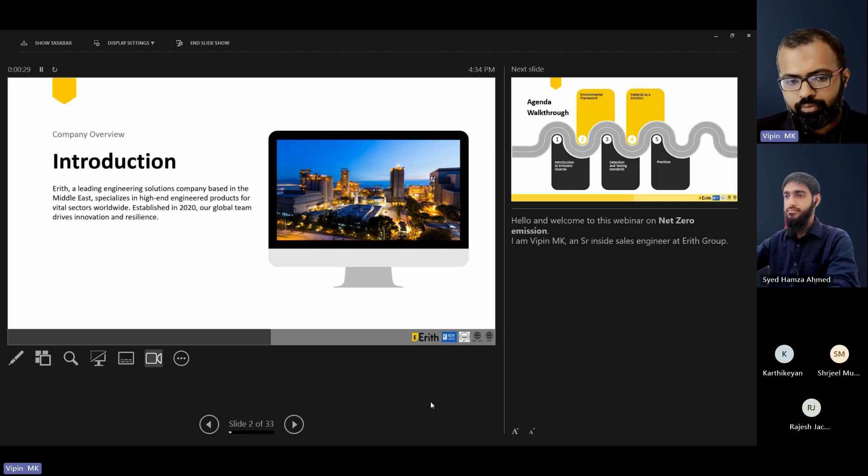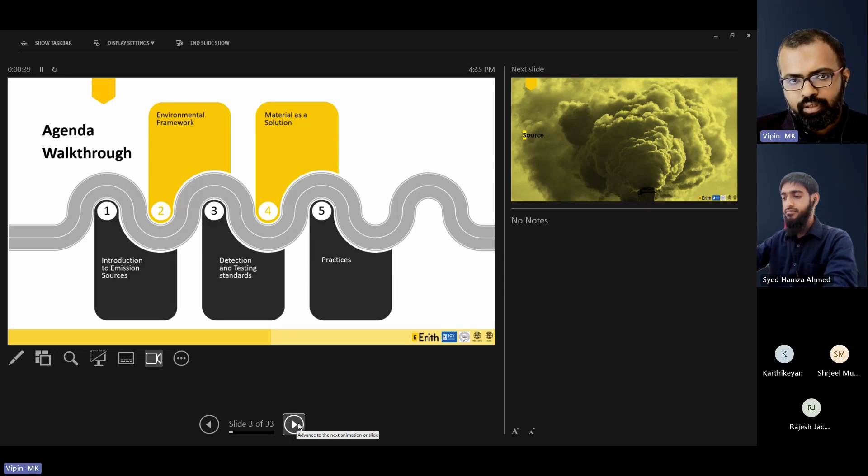So let's walk through the agenda. We'll start with introduction to the emission source, environmental frameworks, detection and testing standards, materials as a solution, and practices.

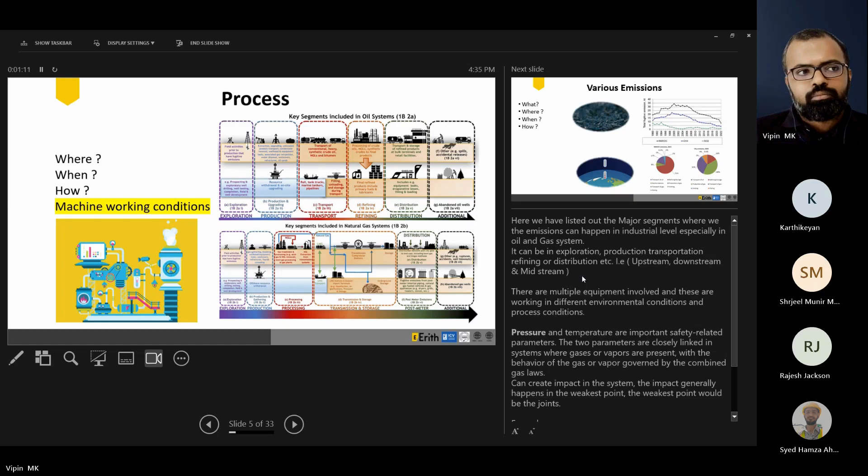So let's start with the source first. So here we have listed out the major segments where we can see the emission happening at industry level, especially in oil and gas systems. It can be in exploration, production, transportation, refining, or distribution, etc. That is upstream, downstream, and midstream. There are multiple equipments involved, and these are working in different environmental conditions and processes.

Pressure and temperature are the important safety related parameters. The two parameters are closely linked in the system where gases or vapors are present, with the behavior of the gas or vapor governed by the combined gas laws, and can create impact on the system. This impact generally happens in the weakest point, and the weakest point would be the joints.

Example, the blowout preventer, BOP, is a specialized valve or a similar mechanical device used to seal, control, and monitor oil and gas wells to prevent blowouts, the uncontrolled release of crude oil or natural gas from the well.

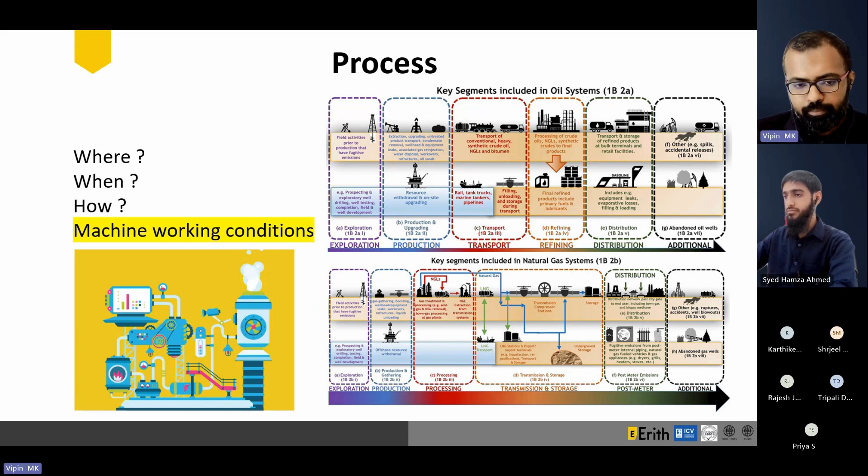Let's get into the next slide. Here we are explaining about the various emissions. You can see the graph which represents the emission level from 1990 to 2022. Below is a pie chart which represents the different segments and the ratio of methane gas and NMVOCs emission in 2022. NMVOCs are emitted to air as combustion products, as vapors arising from petrol and solvent use, and from numerous other sources. NMVOCs can have a negative impact on health and the environment.

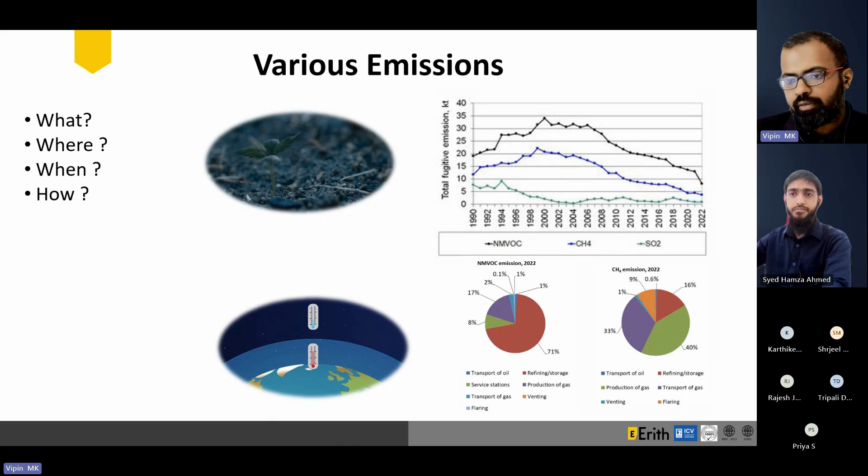Firstly, NMVOCs can react with other air pollutants outdoors in the presence of sunlight via UV, that is ultraviolet, to produce ground level ozone, which can affect the vegetation. Methane emissions are major contributors to the increase in greenhouse gases in the Earth's atmosphere and are responsible for up to one third of global heating. Methane is a potent greenhouse gas.

In this slide, we'll speak about the equipment which is emitting the uncontrolled fugitive emissions. As per the pie chart and as per the observation, it's around 60% of emissions which is from the valves, and other equipments like pumps, compressors, flanges, relief valves contribute the other 40% of emissions. As we have discussed in the first slide, the pressure and temperature are the important safety related parameters.

Here, we at Erith can solve 90% of emission from the equipment present. We will share the insights in the coming slides.

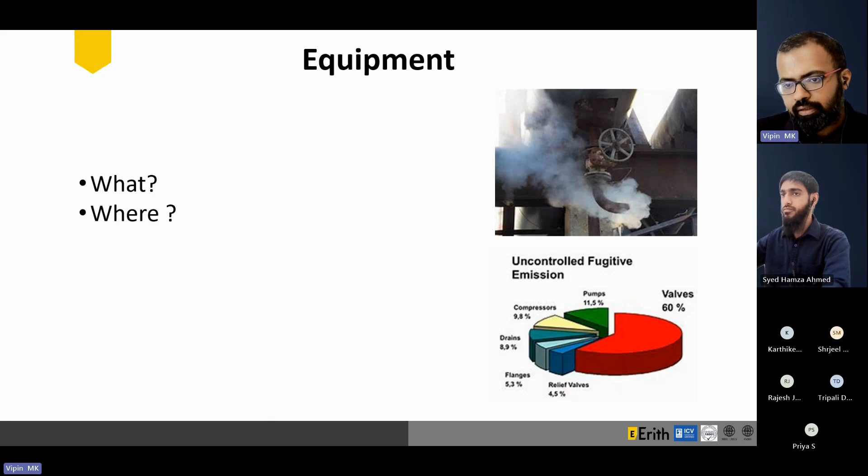Observation of leakage. Where to concentrate? Valve stem and other sealants like the flanges are the major part in a valve where the leakage can happen. Valve stem alone contributes around 80% of emission and the other 20% from the other joints like flanges.

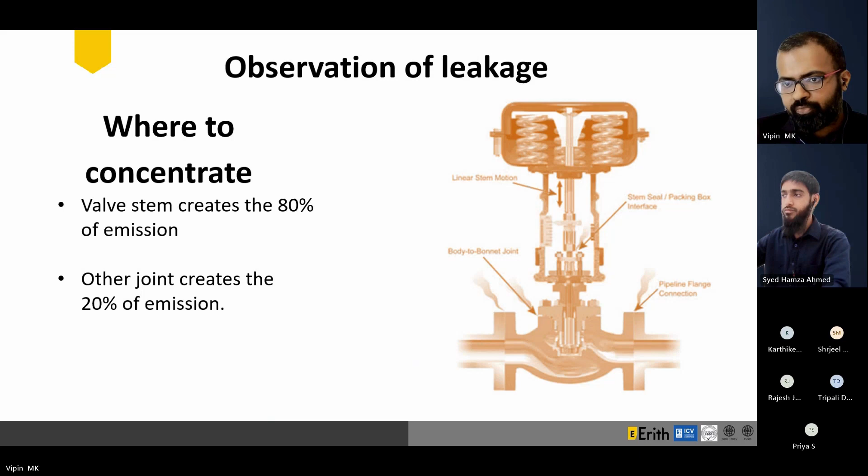Let's get into the environmental framework. So here we'll be discussing about the governance and other related parameters. So again we have to discuss about where the emissions are happening. It is happening due to human activity, because of different processes which are not monitored, or we can say ignorance, and because of that this is happening.

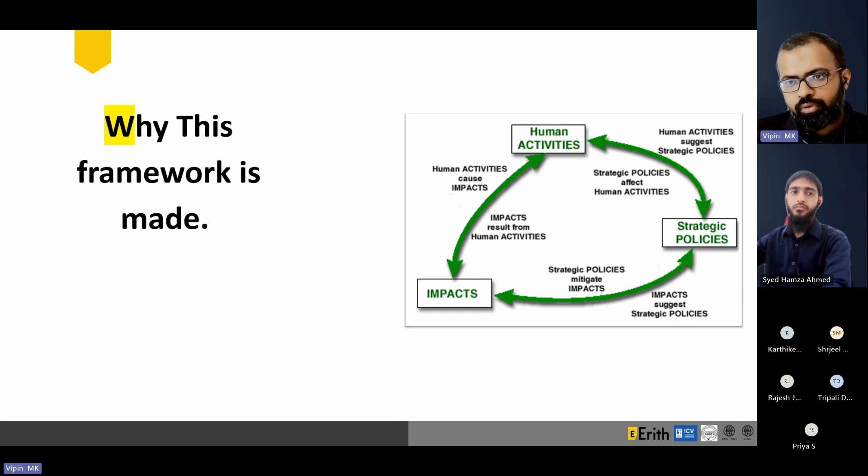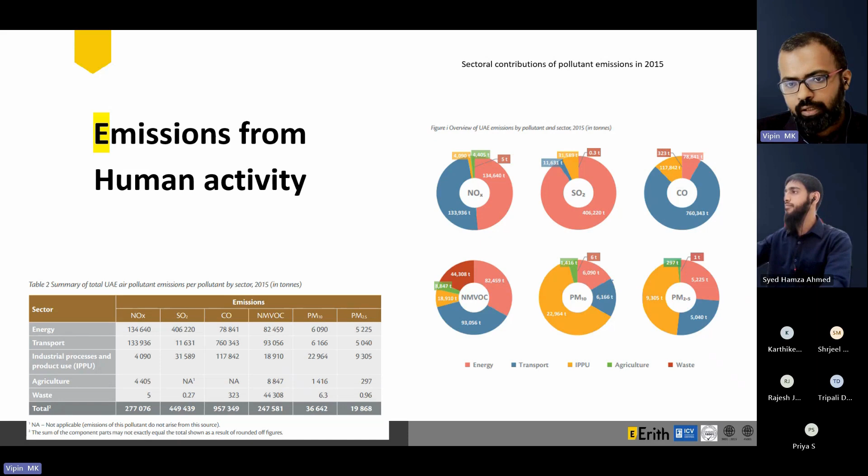So the government has framed different laws and governing departments for controlling this. So this is one of the insights from the UAE government, saying what is the amount of emissions happening from energy, transportation, IPPU industries, agriculture, and waste. So different emissions like NOx, SO2, carbon monoxide, NMVOCs, PM10, and PM2.5. So these are some of the emissions which are happening.

So here we have listed out the governing agencies and their agenda for upcoming years, that goes from 2031 to 2050. So Federal Law number 24 of 1999. So there are different legislations, strategic reviews, and also the stakeholders and consultants who are working behind it for achieving the agenda.

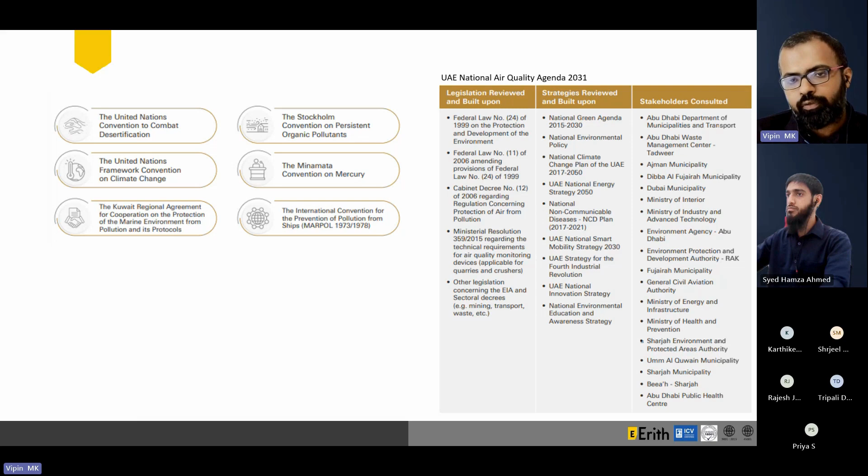This is the Kyoto Protocol, which is specifically for the industrial segment. This is COP 28. The first COP was conducted in 1995 at Berlin, and there have been around 28 sittings. This Conference of Parties, COP, was recently conducted in the UAE.

So from that, this is the outcome. Methane is the primary component and responsible for around 1/3 of planetary warming. This tends to grow up to 13% by 2030. So the governing agencies should concentrate on and reduce this level of emission.

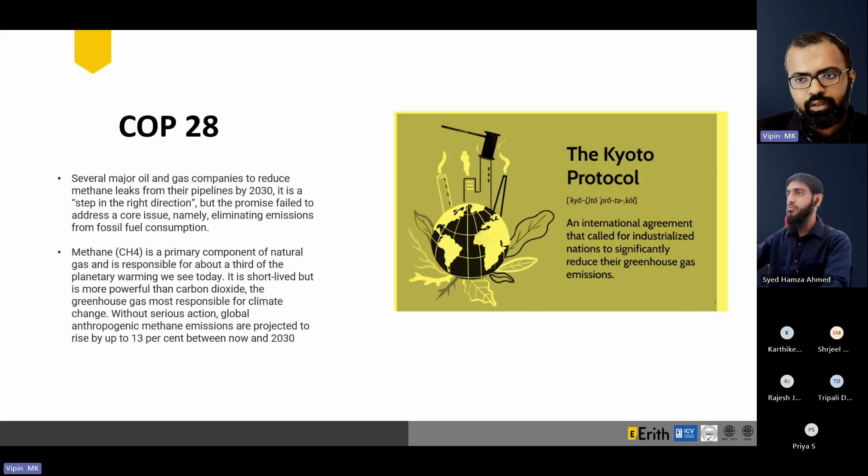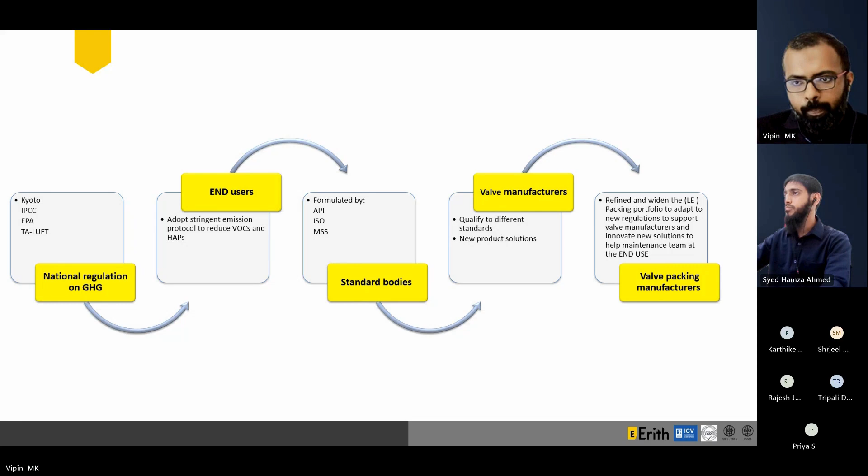Let's move on to the next slide, the detection and testing standards. This is a small flow chart which represents, from the governing agencies to the end users, the standard bodies, valve manufacturers and valve packing manufacturers, what they do and how they cater to attaining the environmental laws. We will get into the next slide.

This is the LDAR program, which is designed by the EPA. It started in 1999. This is a reactive approach, leak detection and repair. It is a program designed for when a leak happens in a refinery or petrochemical industry, and what actions are to be taken. This is designed by the EPA.

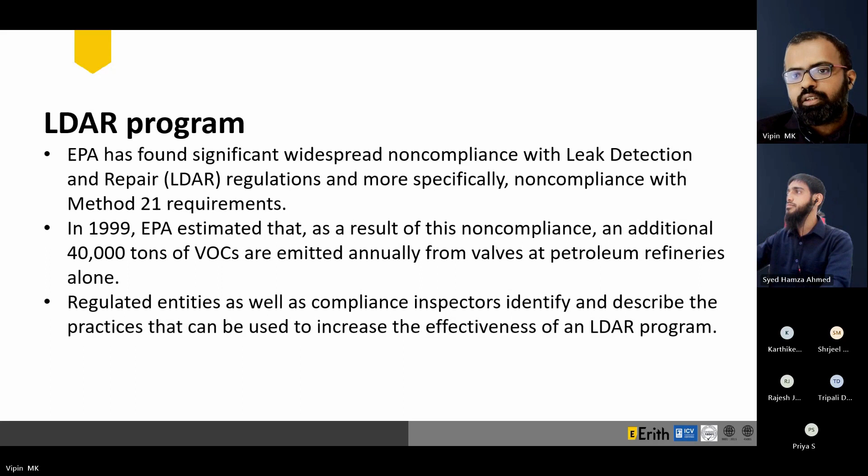So in the proactive approach, we can give a solution based on your design condition, where we can help with product selection, installation, maintenance, even the affiliated components like flanges, studs and bolts selection. We can even advise on the torque parameters. In case you want any certification, we can also provide that.

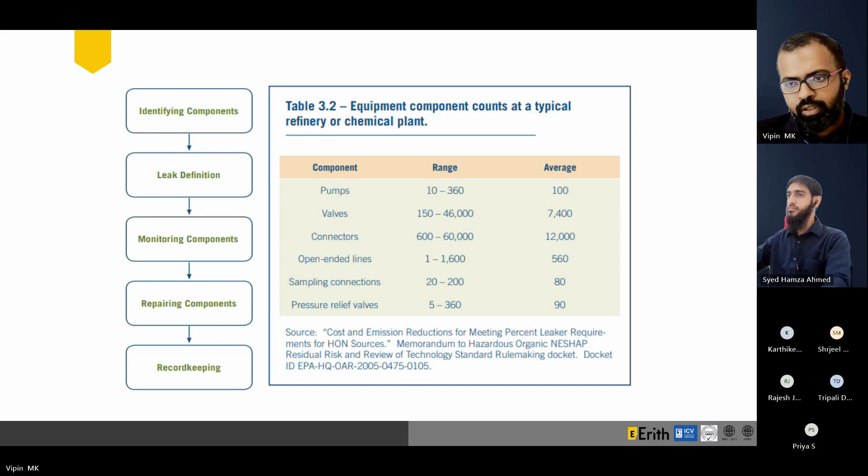In the next slide, we will be explaining fugitive emission. We'll mainly concentrate on ISO and API. There are two parts, part 1 and part 2, for ISO 15848. For API, 622, 624, and 641.

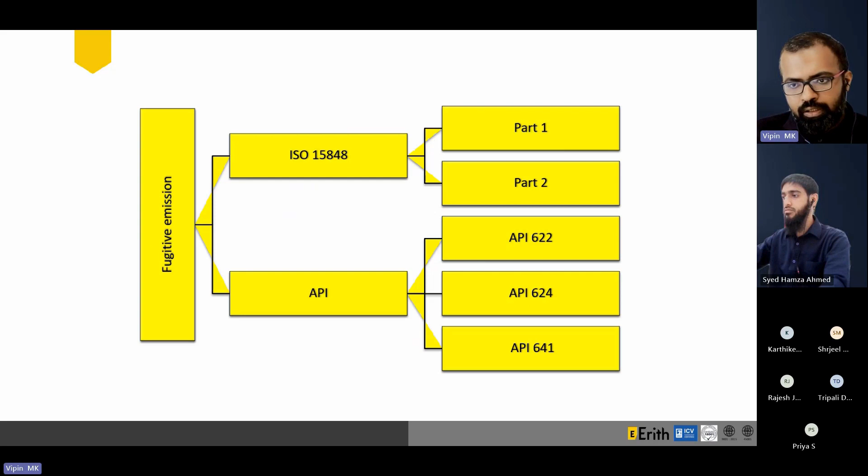In the next slide, I will just show you the emissions testing equipment involved. The flow starts from the methane, which is 95% to 97%, then goes to the pressure-controlled methane, and then to the flanges. The setup has an actuator which reciprocates, and this gives a real-time prototype model. This is just a model of the actual running condition. So with this we can monitor the emissions, and the certification will be provided based on that.

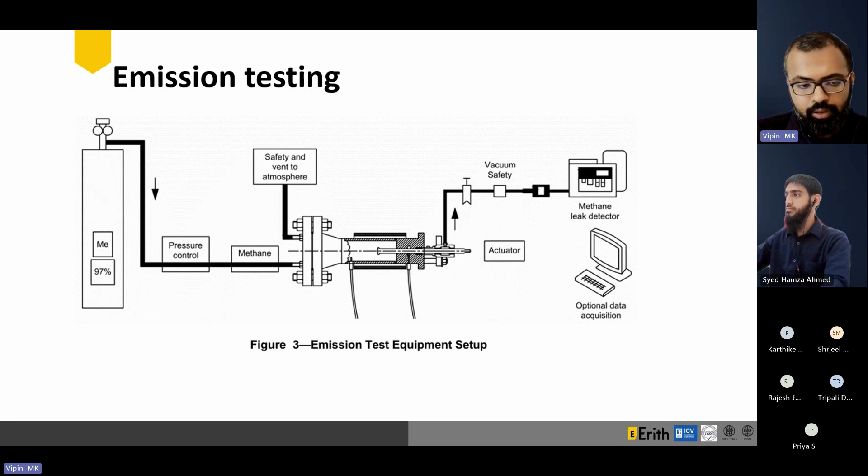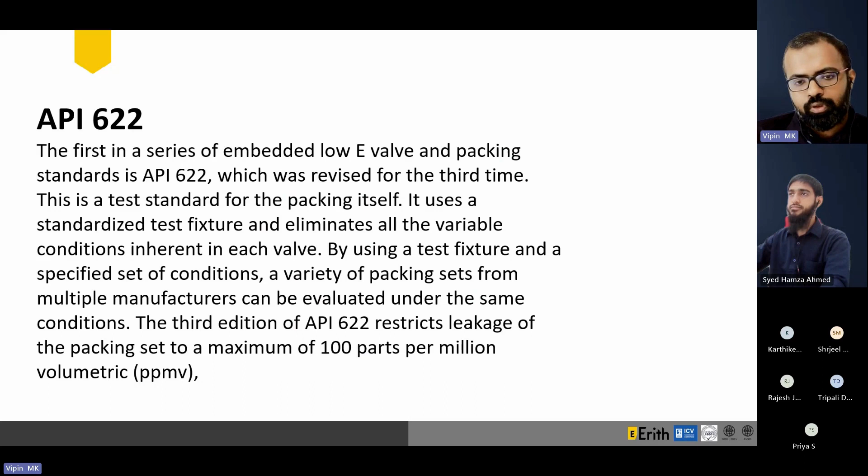API 622. This is one of the standards for valve packing. There have been around 3 revisions made to API 622 based on the current environmental conditions. Now it has narrowed down to around 100 ppmv, and at Garlock we are certified for API 622 fugitive emission for valve packing.

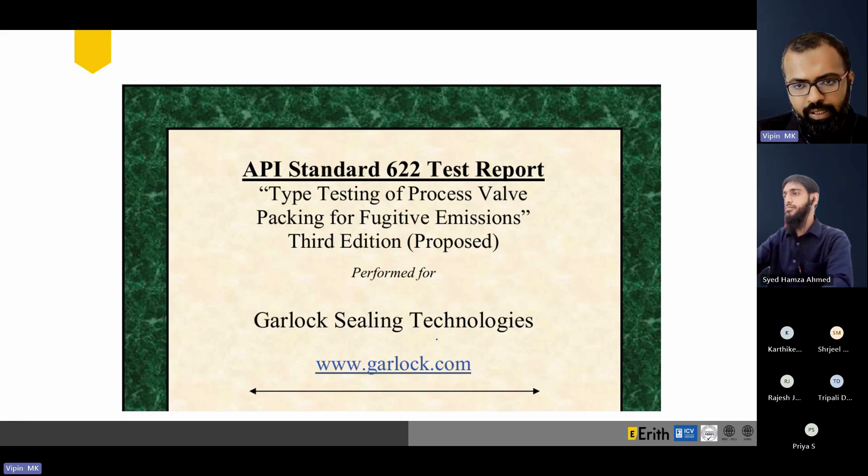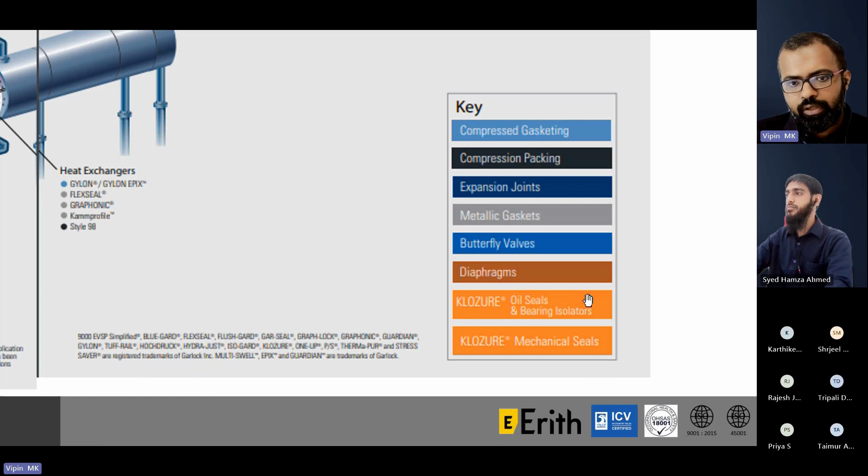In the next slide, I will show you a small model of a chemical plant and some of the equipment involved, and what solutions we can give. I'll just zoom through it. Here you can see the key components like gaskets, compression packing, expansion joints, metal gaskets, butterfly valves. These are some of the solutions we can provide to you.

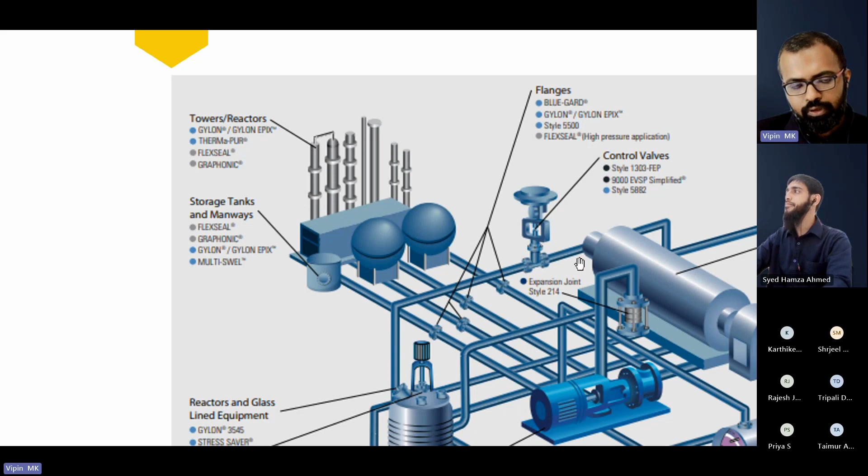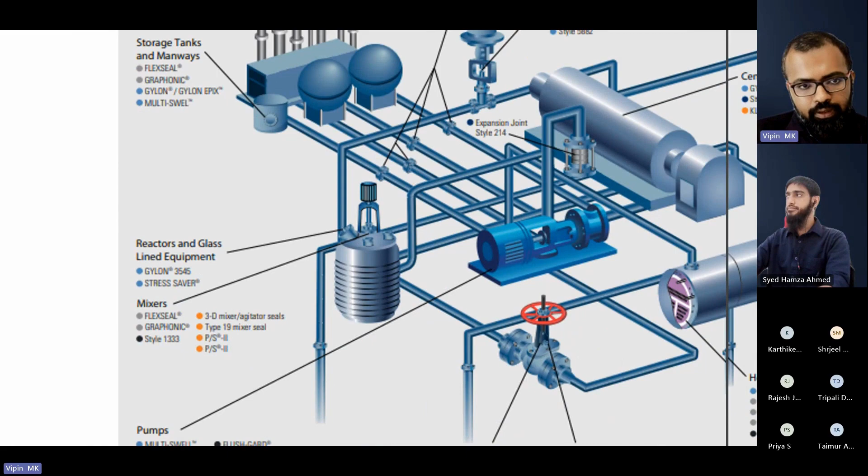These are some of the brands specifically designed for the conditions involved, like for the towers, cooling towers or reactors, for the flanges, control valves. So we have designed the solutions specifically for these applications. Here we will be explaining only the valve packings, especially LE packings, that is low emission packing.

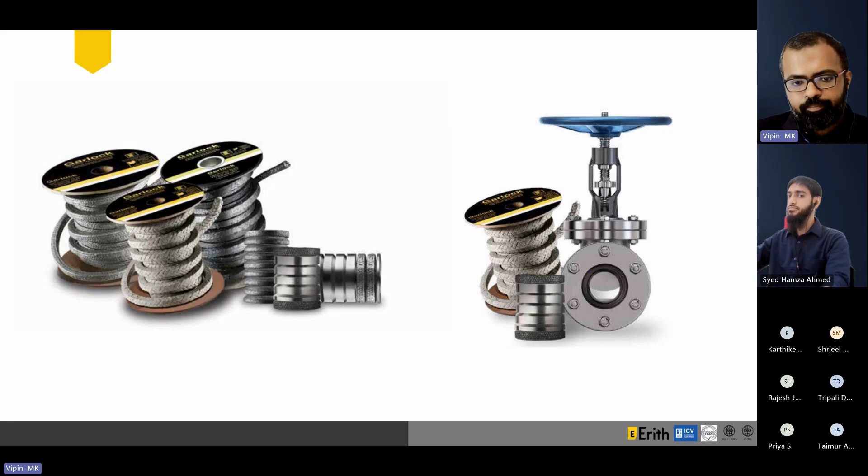1303 FEP. This is one of the key solutions for fugitive emission. It is a graphite packing for valves made with Graph-Lock yarn containing Inconel in it, making it thermally conductive. The style 1303 FEP was designed to comply with most VOC and VHAP emission regulations. Graph-Lock is a compound of pure exfoliated flakes of graphite material.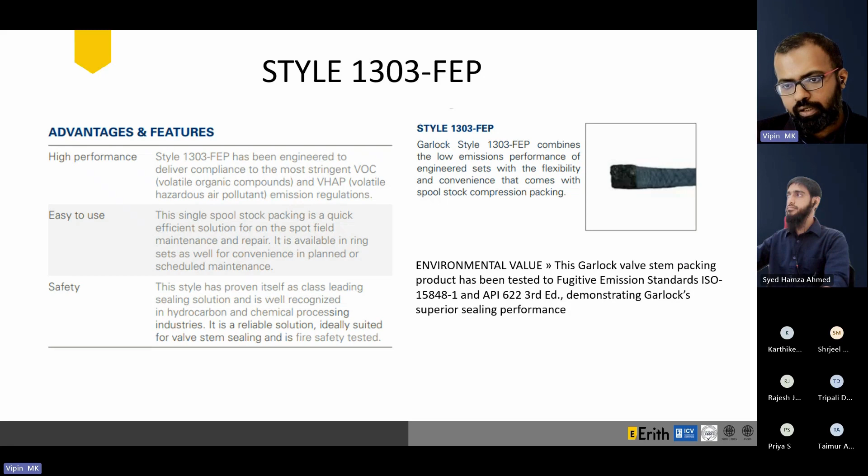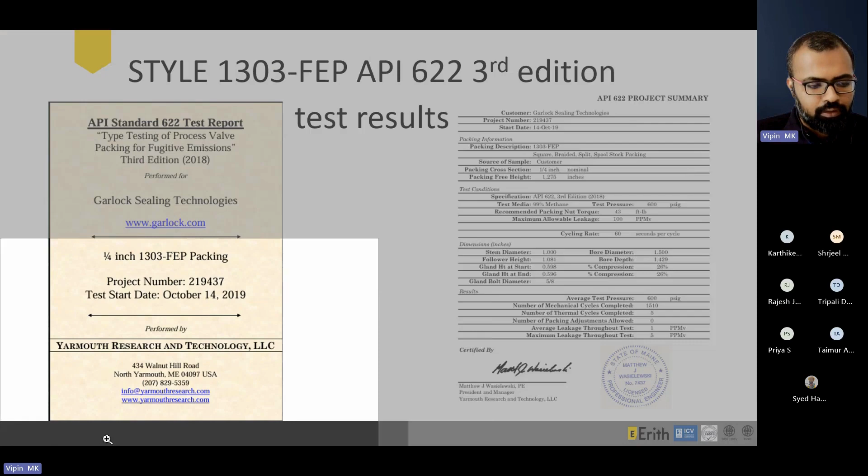And here I have shown the 1303 FEP testing standard according to API 622. So this is the real-time testing which is conducted for this one, and I'll just zoom in through the results of the test.

This is one of the key solutions. This is a quick set, which is designed for old and worn out valves which are already in function. This cup and cone design is a patented technology, which is an optimum solution. This is for the quick replacement format. There is no requirement to completely dismantle the valve from the line.

This is designed to do the repair works and replace the compression packing when it is in the line. We need to switch off the process and comply with the refinery laws, and then we can carry out this procedure.

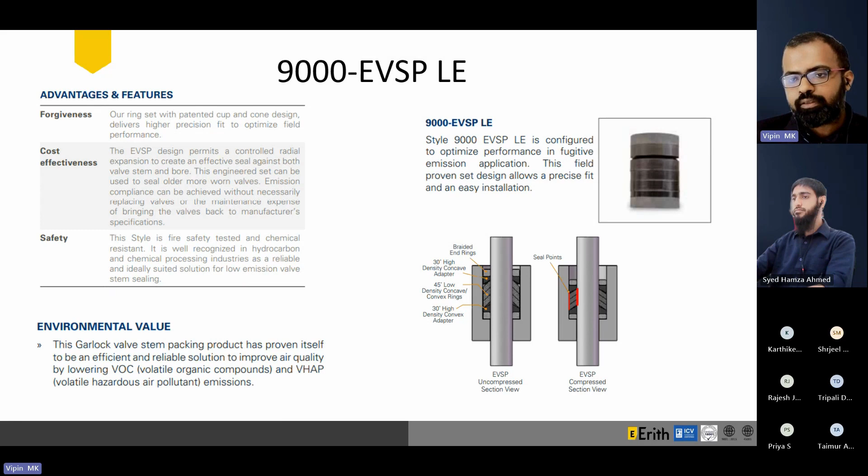So 9000 EVSP LE is one of the types of quickset. This is one of the low emission packing lineup designed for the quickset format. 9000 EVSP simplified set expands radially when the gland is tightened, creating a positive valve stem ID and OD seal as well as stuffing box ID seal. So as I have shown in the previous slide, it can create a good active sealing.

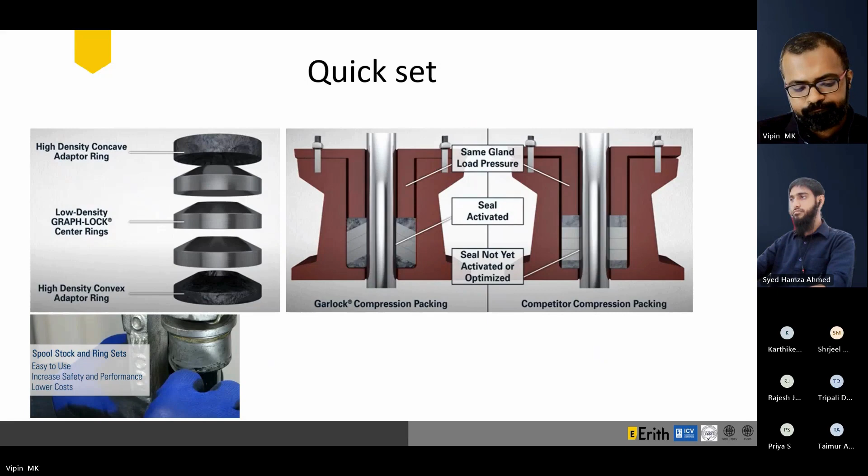This is 9001 quickset. Low emission service for long life, and it can be used for shallow stuffing boxes. The compact design of the quickset helps reduce valve stem friction over the other taller set designs, resulting in more effective, less costly use of plant resources to control actuated valves.

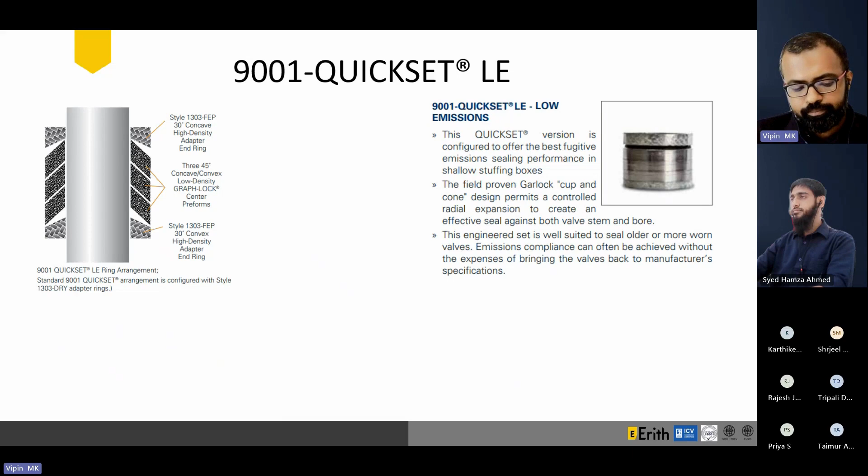This is the assembly process for the quickset, where we have to dismantle the complete valve assembly and then measure the ID and OD of the stuffing box. We have to measure also the depth of the box, and based on the design condition, we have different sets of quick set available, so we can do accordingly.

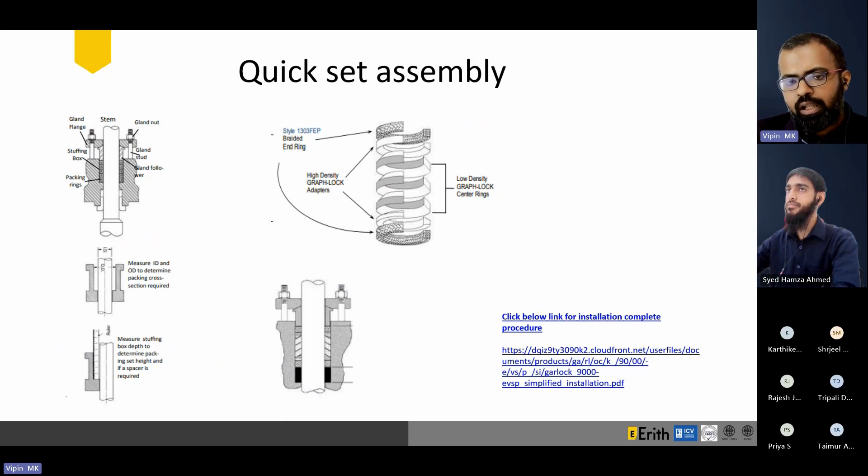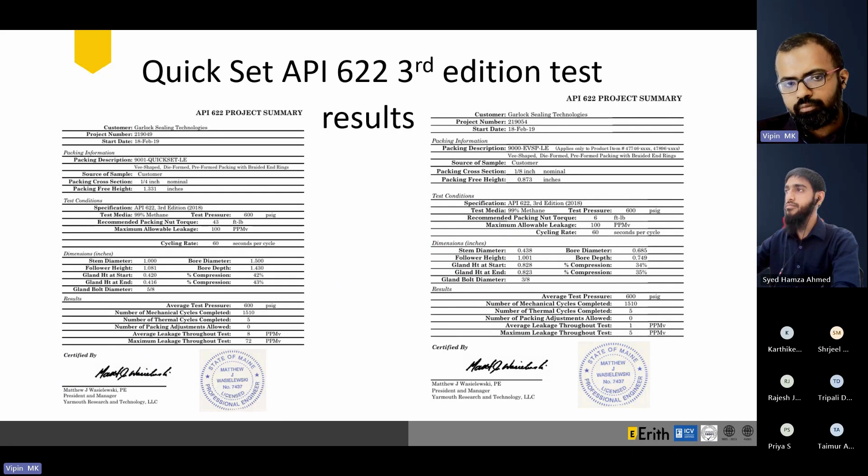For 9001 and 9000 quickset assembly, this is the real-time testing certificates.

The next one will be the 212 ULE, which is designed to meet the stringent fugitive emission testing standards, and also offers fire safety and chemical resistance over other low emission valve stem packing products. This is easy to use.

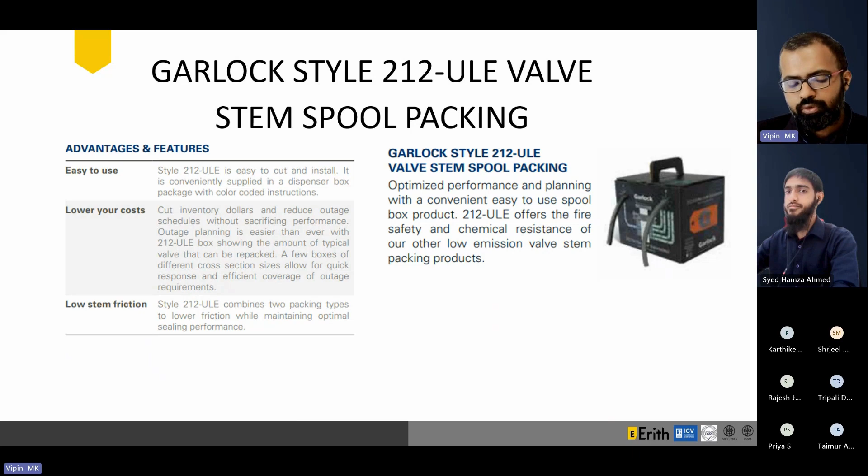This is actually designed for the LDAR process, where once the leak detection happens, and if you want to rectify it, this will be helpful, where you can carry this box to the site, and you can use this further. This will simplify the LDAR program with the 212 ULE.

So there are two packings. One packing you can use in between. So there is a combination based on the parameters. There is a combination advised in the box itself. The parameters will be written down, so you can use accordingly.

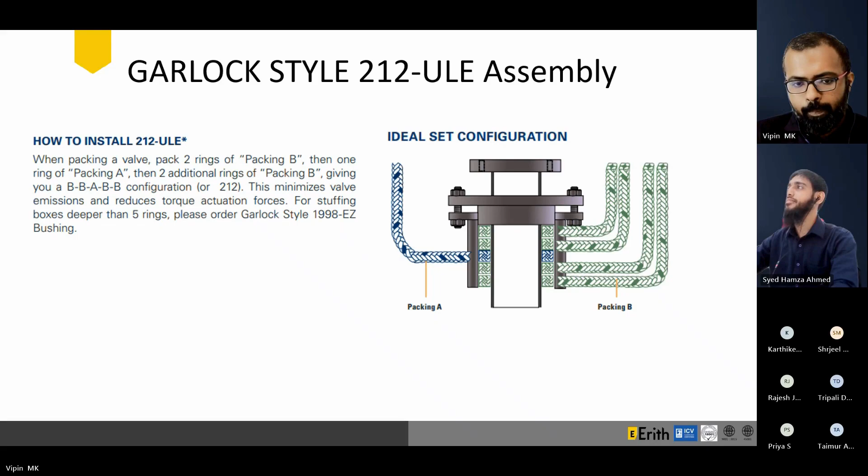So I'll hand it over to Hamza for the further presentation. Okay, thank you. Thanks, Vipin.

Vipin has given us an amazing detailed overview of the emission standards in place, the sources of emissions, and the solutions for the emissions that are currently seen in the industry. Apart from those, I'd like to add that we do have a range of products that cater to the replacement of these compression packings from the system.

So we have a stem. We need the compression packing that is worn out to be removed from the gland, and we need to place the new compression packing in.

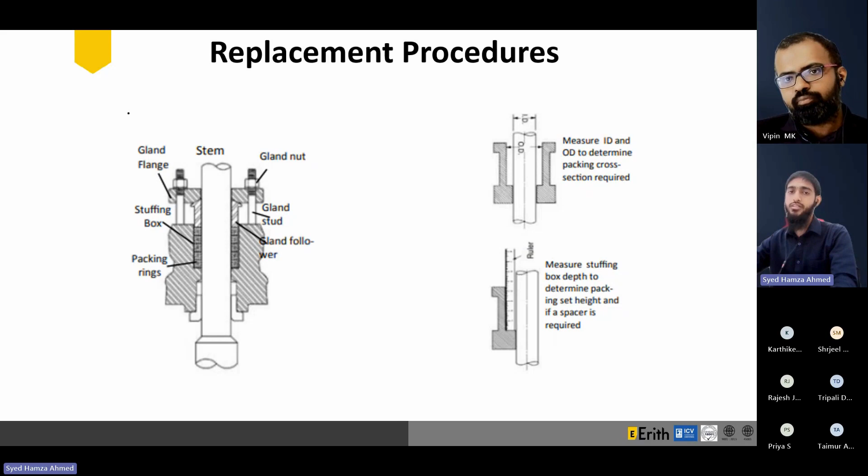For these replacement procedures, or if it's a new valve that is being put in place, we have to put a new compression packing into the gland, and for those we will require tools. For an effective installation and replacement, you will need a complete range of tools that are designed for packing maintenance jobs.

So, talking about the installation procedures for a safe and effective compression packing installation, you will need vernier calipers. You will need heat-treated basic spare tools. You will need steel blades if you require field cutting of these compression packings. However, we do provide compression packings according to your size, according to the requirement of either a spool or cut rings. Both are provided. But if it ever occurs that you require field cutting, then you will be requiring these steel blades as well as different products.

So we have corkscrews. These are used to pinch into the compression packing that is already put in place to remove the worn out compression packing. These come in different types of tools. One is the solid rod, and the other is a flexible rod. Both can be used to take out the compression packing that has worn out, and these corkscrew tips can also be replaceable. So we do have that tool that replaces the corkscrew if it is worn out or damaged after multiple uses, so that you don't have to change the entire tool all over again. So these can be replaced at a minimum cost.

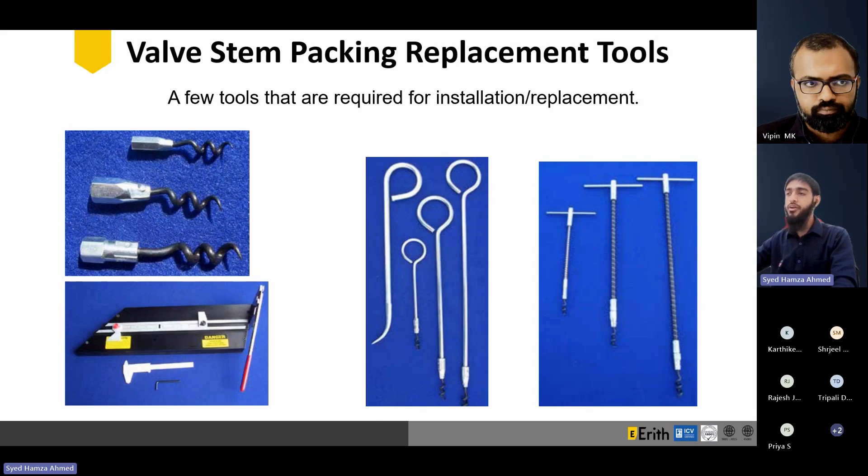Apart from that, as we've talked about the sources of emissions, 80% of emissions from a valve are from the stem. However, we are going to talk about the 20% remaining emissions that do come from the valve bonnet or the flange connections of these valves. So, in order to have a holistic overview of emissions control and to provide a complete solution to every emission-related problem, the family of gasketing products that Erith offers provides a unique advantage over conventional sealing solutions, whether it be high temperature gasketing needs, or corrosive or abrasive media. We have a full line of gasketed products for chemically aggressive service as well as highly corrosive media.

So the gaskets that we provide can be sheet and cut gaskets, being non-metallic gaskets, as well as metallic gaskets. So the usual Kammprofile, corrugated metal gaskets as well as spiral wound gaskets are provided, with materials such as commonly found stainless steels, all the way to exotic metals, as per the requirement of the service media or the processes. If we talk about the non-metallic gaskets, we have premium grade rubber gaskets. We do have aramid fiber gaskets, as well as extreme temperature capable gaskets of up to 1,000 degrees Celsius. And we have other graphite and carbon-based gaskets also.

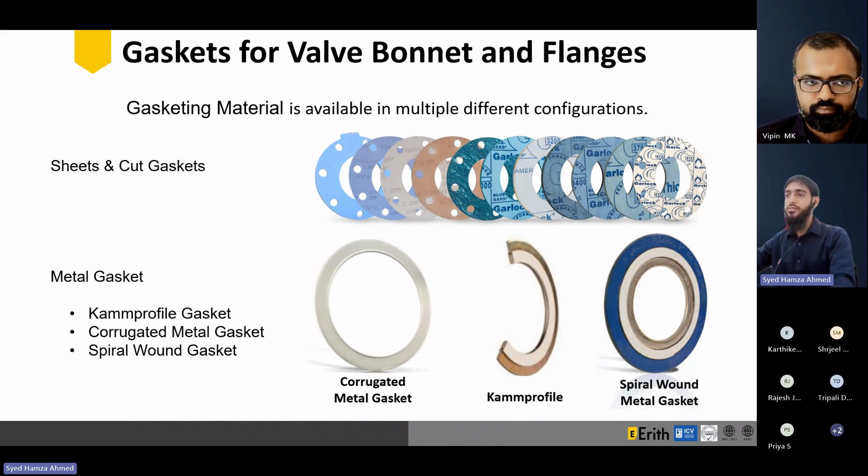I feel like with this, we have covered the valve-based application of sealing solutions for emission controls in as brief a manner as possible.